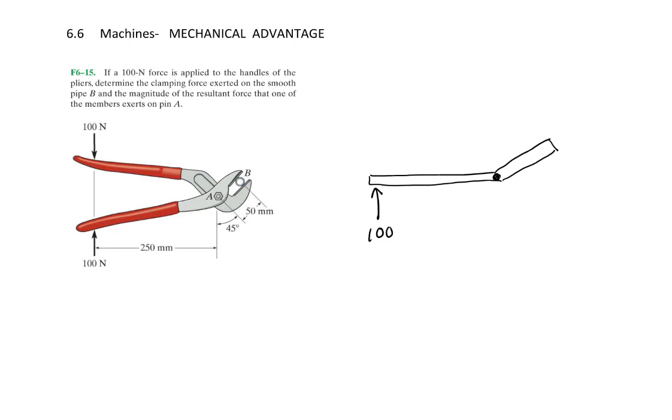There's a pin here, so let's go ahead and draw the pin. There's a force being applied there of 100 newtons. And here, the pin or the pipe is pushing back that way on that part of the handle. In other words, let's draw a free body diagram of just that round part. We're trying to pinch it like this. So whatever that pinching force is, this B, is going to transfer equal and opposite to the handle, or to the jaw. Alright, let's see what we got.

Let's draw the rest of our forces here. I have an AY and an AX. Let me draw it the other way. AX there, okay.

If we want to find out what B is with that 100 newtons, all we have to do is sum the moments about A. Sum of the moments about A equals 0. So I have B times its lever arm. Again, it doesn't matter about the angle, it's just that distance, so it's 50 millimeters. And then minus 100 times its lever arm, which would be 250 millimeters, equals 0. So the clamping force is equal to 500 newtons. That goes pretty fast to find the clamping force.

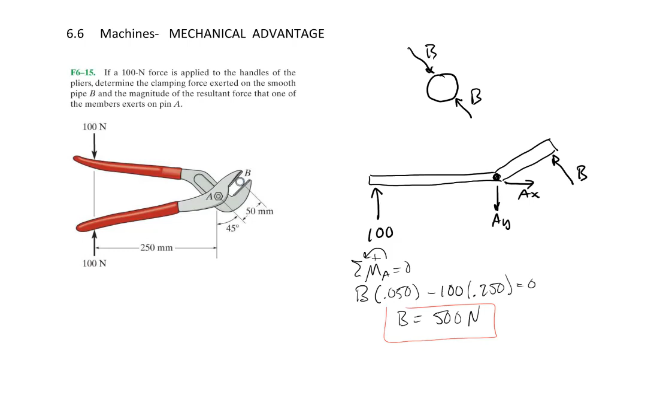If I wanted to find the reaction forces at the pin, then we have to go back to the forces in X and Y. Sum of the forces in X equals 0. So I have AX minus—well, here I better put some components. There's going to be a B with two components; it's a 45-degree angle, so this is B cos 45, and this one is B sine 45. So let's put that in: minus B sine 45 equals 0.

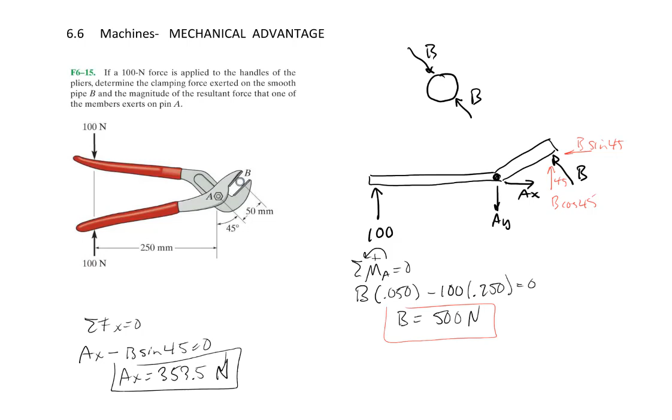So AX is equal to 353.5, and that is newtons. And sum of the forces in Y: positive 100 minus AY, plus B cos 45 equals 0. So AY is equal to 453.

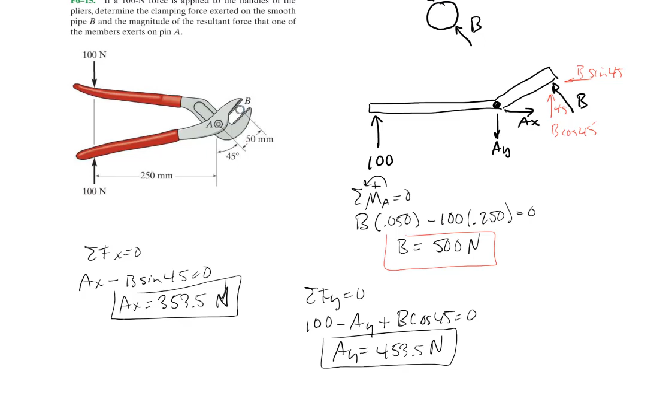What often happens in these machine problems, and in any kind of machinery problem, is we sometimes care more about the magnitude of the force at the pin than about the directions. If we wanted to find the magnitude, we'd do the square root of the sum of the squares: AX squared plus AY squared. And that's going to be equal to 575 pounds. That's the actual shear force that's going to be on that pin.

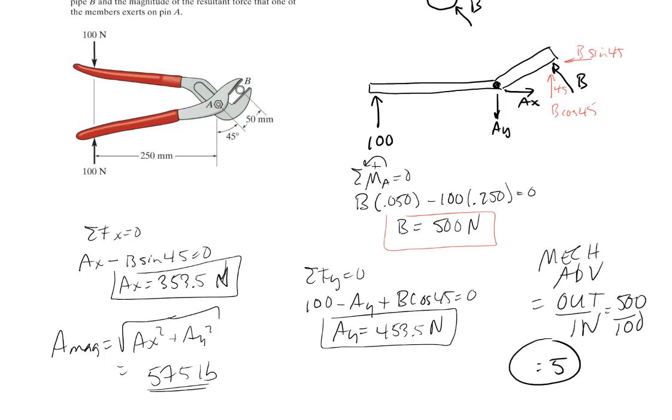We'll talk about shear and what that really means in Chapter 7. Now, what is the mechanical advantage? Mechanical advantage equals out over in. In this case, I have 500 out and 100 that I put in—I didn't put in 200, only 100. So the mechanical advantage here is equal to 5. That'll be something you'll need to be able to calculate.

Here's another very common machine: a Vise grip. You probably have one in your tool drawer at home, or in your pocket if you're a good mechanical engineer—I'm just kidding about that. But at any rate...

The way this works is you push some force here. It's got a little compounding mechanism: there are actually 4 moving parts—this one and this one on the top, then the two-force member, and there. So again, look for a two-force member; it's going to be in compression.

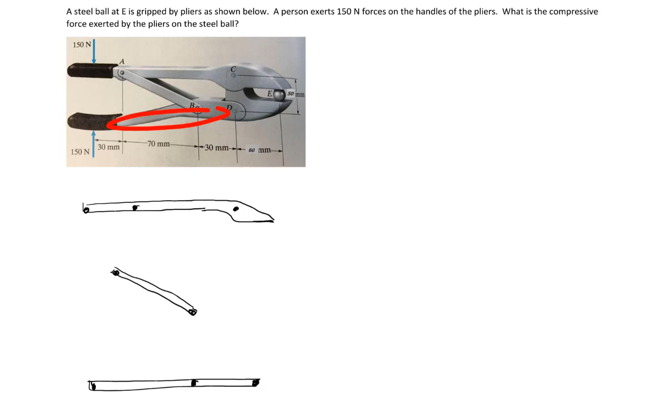So how do I go about solving it? Let's draw the forces on the portions of the free body diagram. I have chosen to look at these three and not this one—after you get some experience, you'll be able to see why I did that. Let's go ahead and put the forces in: I have 150, and this is my pin C, so there's going to be a CY and CX.

Now the pinching force or clamping force at E, I'll put here at EY. Before I draw what happens at A, let's draw the 2-force member. It's in compression, so I'll draw it like this, between A and B, and it will have two components: AX and AY, BX and BY. I'll go ahead and put those in.

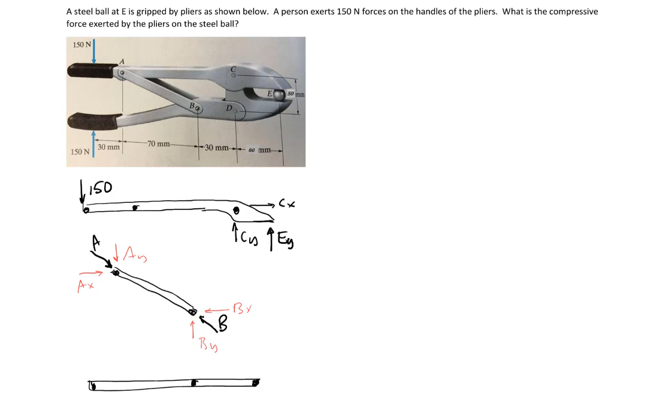These forces transfer equal and opposite to that pin at A, so I'll go ahead and put those in there. I'll say AY and AX.

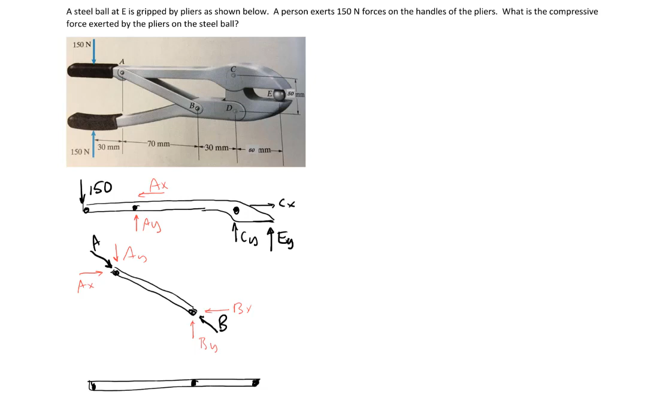Let's go ahead and finish it with the bottom one. I have 150 going up here. Here's where the pin, or the two-force member, contacts the bottom part, so I'll put BX and BY there. And then there's a pin over here at D, so I'll put DX and DY there.

Okay, with all the forces there, let's see what makes sense about where we can start. Looking at the top, I have an applied force. I know this is a two-force member, and I can get some relationships, but I have no numbers. Down here, I have something I can work with.

I have 150 here. If I sum the moments about D, I should be able to find BY. So I'm going to start here at the bottom. Again, only experience, I believe, helps you determine where to get started.

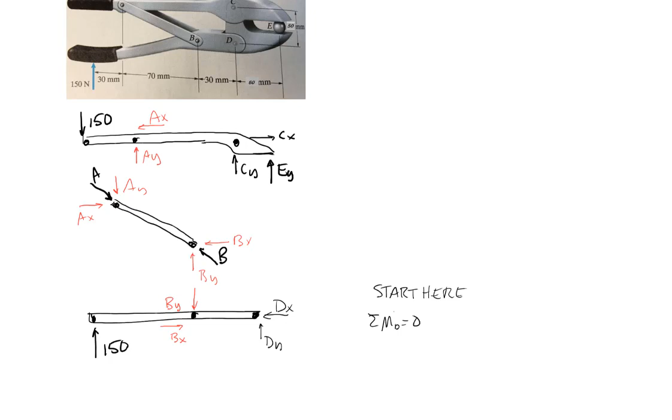But I'm going to sum the moments about D. Sum of the moments about D is equal to 0. So in this case, I have minus 150 times 130 millimeters, I'm leaving it in millimeters for this problem, plus BY times 30 millimeters equals 0. So I have BY is equal to 650.

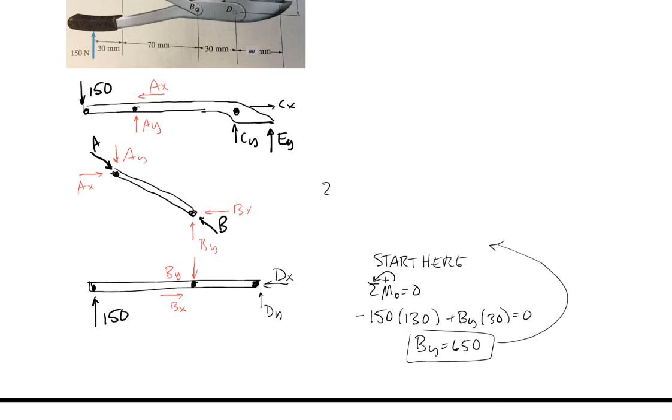If BY is equal to 650, I could recognize that this is a two-force member, which it is. I know that AX is equal to BX and AY is equal to BY, which is equal to 650. And I can transfer that into this analysis.

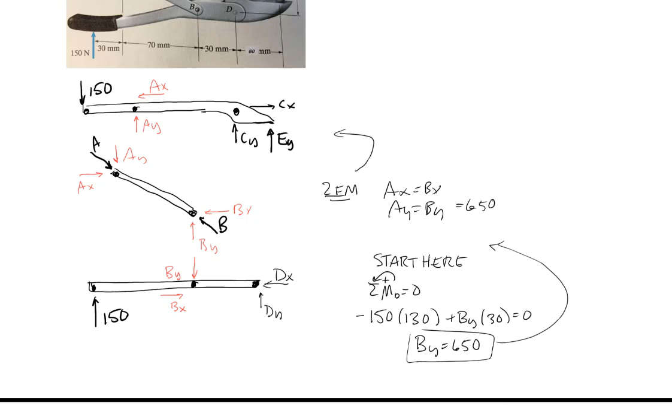So now let's sum the moments about C. What I'm looking for is EY. If I sum the moments about C, I'm going to have plus 150, which is this force over here, times this lever arm, which is 130, minus AY times 100, plus EY times 60 equals 0. I think I've included them all here.

If I sum the moments about C: 150 times this lever arm, going in that direction, that's positive. AY times this lever arm, negative. And then EY times this lever arm, positive. And that's all I put there. I've already solved for AY. I've given that, and I can solve for EY. So EY, which is the question, is equal to 758 newtons.

So with a fairly short analysis, you can solve a pretty complicated problem sometimes. Sometimes they're more difficult, but this one, even though it looked pretty complicated, turned out to be fairly straightforward.

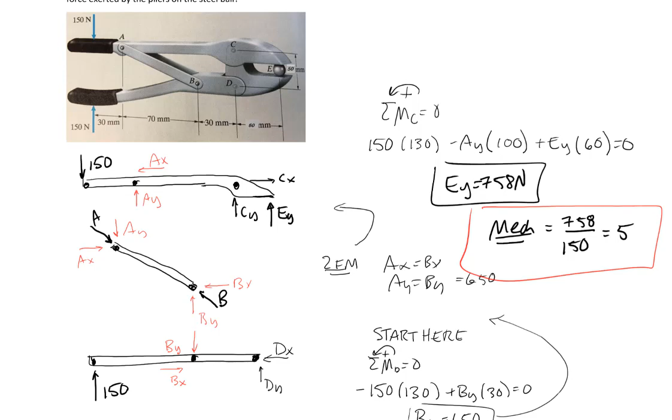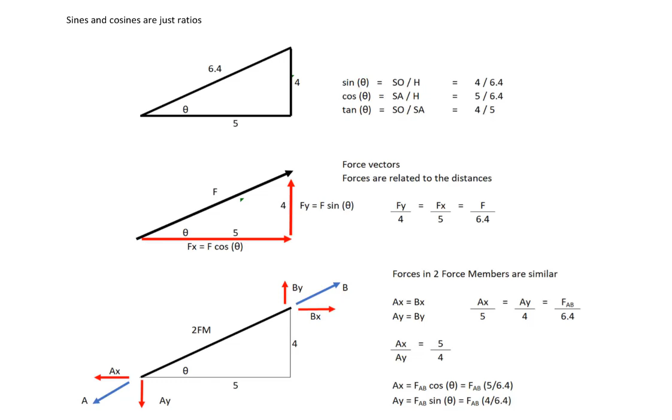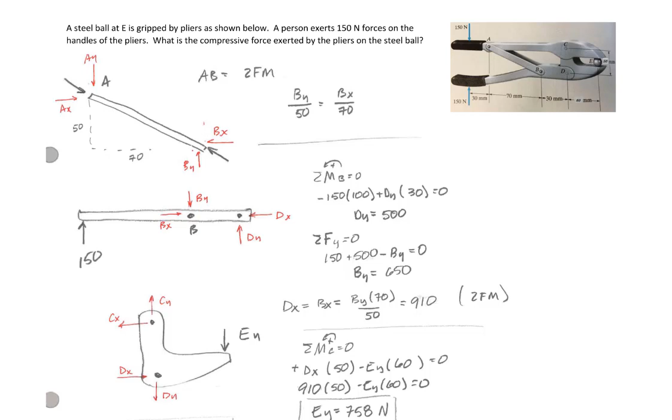Now I just want to look at this problem again using a little bit different approach. You can look and see how this one was done. I did a different solution here using different members, but in this case I used the two-force member, the jaw right here, and the bottom. I didn't use the top part at all. Anyway, you can walk through and see how I did it and see if this makes sense to you. Again, either way is appropriate.